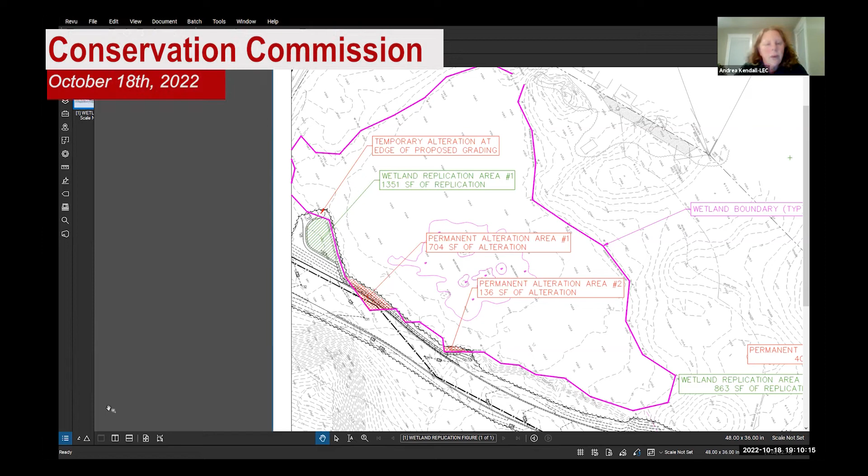A series of hydrophytic plants, wetland plugs, shrubs, trees, and ferns will be installed within the wetland area. As we grade up to join the grades in the upland, we'll be proposing a buffer zone restoration adjacent to there, where we'll be putting in native trees and shrubs.

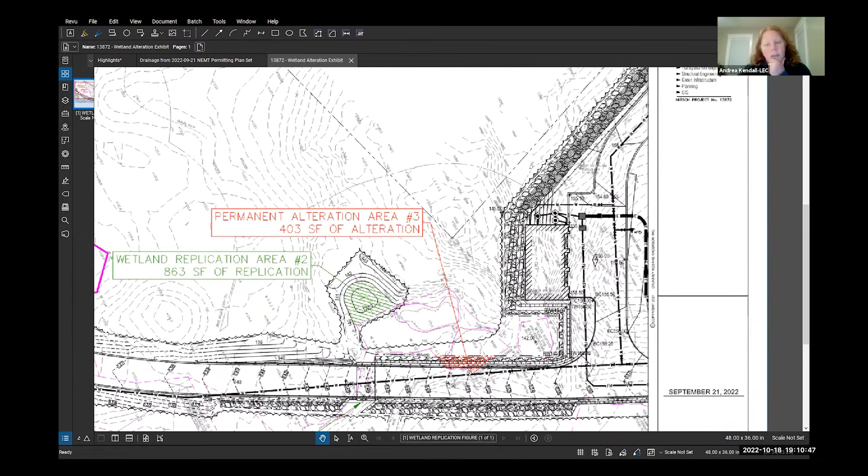The same approach is planned over at wetland 3, where we're proposing 403 square feet of wetland impact adjacent to the retaining wall, and the wetland replication area size is 863 square feet. We'll be cutting back the contours, lowering the grades, putting in wetland soils if needed, and then planting it, along with planting the buffer zone area.

In terms of isolated vegetated wetlands that aren't subject to jurisdiction under the Wetlands Protection Act, we're impacting 213 square feet between wetland area 3A and 4. The amount of wetland replication we're providing totals 2,214 square feet, providing mitigation in total for all the wetland impacts.

When we consider both BVW and IVW impacts, we're providing a 1.5 to 1 ratio of replacement to impact. If we didn't consider the IVW and just took into account the BVW, we're providing a 1.8 to 1 ratio. So we're more than exceeding what's required under the Wetlands Protection Act, which is a 1-to-1 replacement.

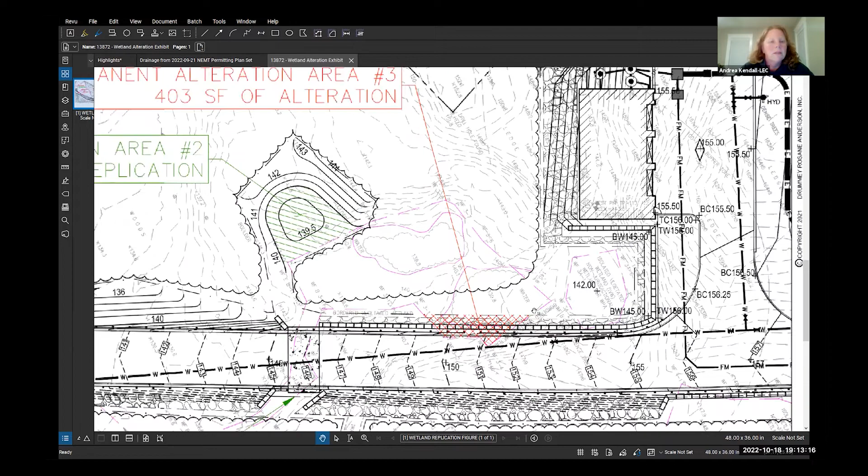For each of the impacts, we're providing wetland replication very close to the impact areas, and that's one of the requirements under the Act. We will be monitoring this for 2 years at a minimum, until everything meets its performance standards for vegetative cover and success, watching for any introduction of invasive species, and providing yearly reports to the commission.

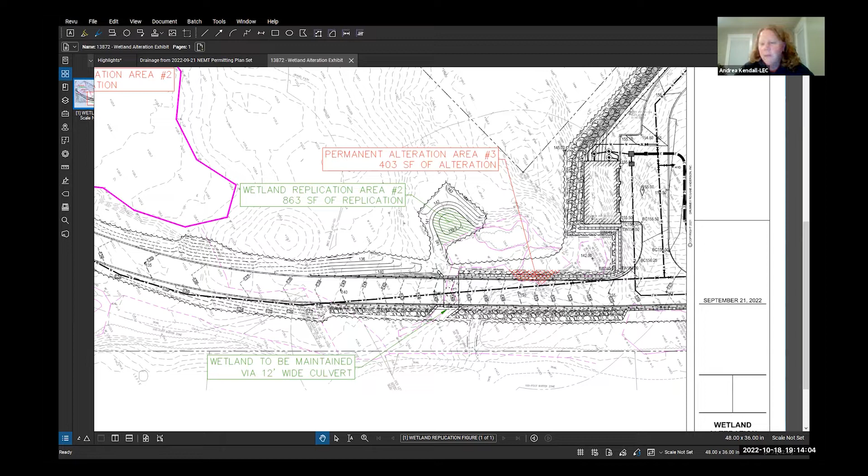Any questions on impacts as it relates to the wetland replication area, before I move on to the crossing? I just have a couple of questions.

As I understand what you're saying, for this wetland replication area number 2, you're regrading around the existing topography to make that depression and do all that stuff, right? Correct. Are these plans showing the existing grades or the proposed contours outside?

Outside of that, I'm just trying to figure out if all these contours here are going to stay the same. Nothing's going to happen out here — nothing has to happen out here to do your work. Is that correct?

Yeah, the dark line work are the proposed grades, and the lighter, dashed line work are the existing grades. We'll be working pretty much within that footprint of the tree hatch to get the grading to blend in back into the existing grades.

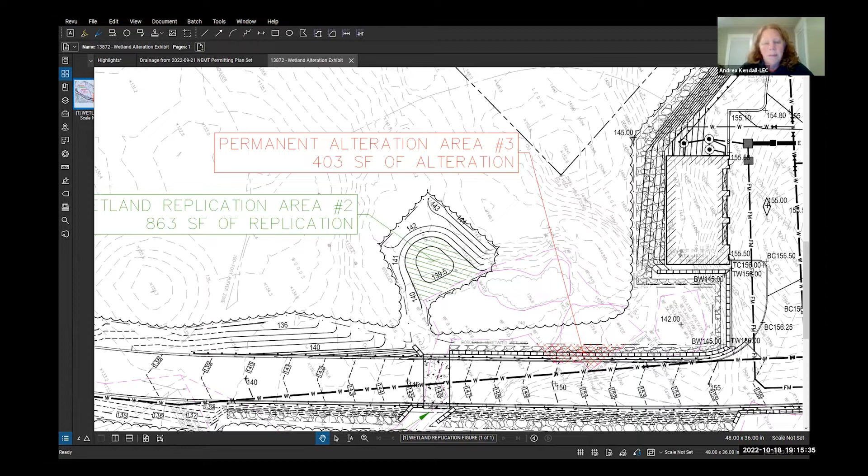So we'll be excavating and moving that material out of this particular area, and depending on whether it's suitable for reuse elsewhere on site, it'll either be incorporated or trucked off site. Okay, so that is the extent of grading. Correct. Now, is this discharge point an existing discharge location in the field?

Or is this a point that you're creating, where you've got this coming underneath the road and going to the other side? That little finger there — at some point in time, somebody excavated that channel. It looks very historic; it's hard to say when, but it probably was an isolated wetland at some time.

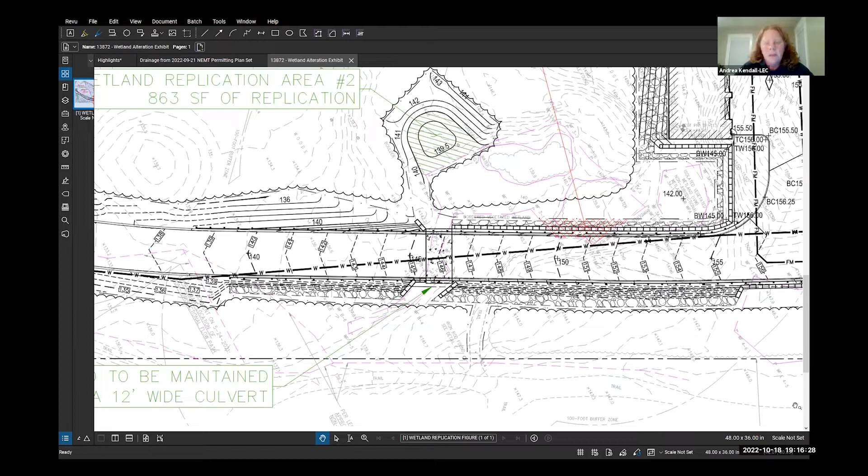When that feature was excavated, it in essence created this little segment of an intermittent stream, because at least on an annual basis there is flow coming out of wetland 3 into that, then dissipating into the forest. It's coming out of wetland 3, correct.

So it flows down, plan south and then plan west, and then that channel feature ends and the water just fans out. We're going to be maintaining that feature through the installation of a 12-foot wide, 3-sided culvert.

It's 3 feet tall and about 30 feet long, and there are retaining walls or wing walls at the top and bottom, to further limit any impacts to the wetland and stream system.

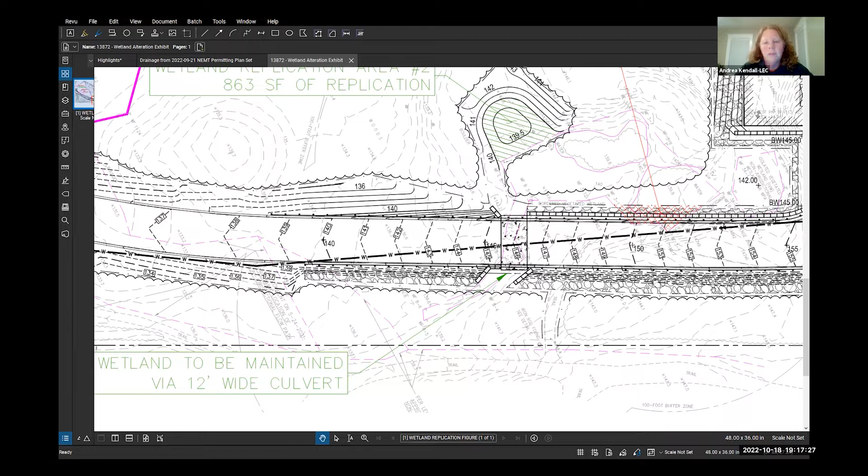Can you move over to the other one, the bigger area, the Wetland 1 area? Yeah.

So you're showing the perimeter of the BVW, so all the grading shown around it is not going to be touched, correct? Right, the limit of work. Everything else, there'll be erosion controls at the limit of work to prevent construction equipment from inadvertently going in there. That will be clearly marked and installed in the field. Everything else, the only activities adjacent to or just inside Wetland Series 1, is all associated with the driveway and installation of the wetland replication area.

So it looks as if you were to cut into the ledge to the left of Wetland 1, you'd be able to shift the road over a bit and potentially stay out of the wetland entirely. I know we saw the ledge there, but it would be possible to cut into that, it looked like.

So shifting the road to the south might lessen or eliminate impacts to Wetland 1, but then it starts to encroach on the other wetlands to the plan south. But it looks like there might be room to curve that road a bit more to the left, or plan south, after that wetland, right where the grade starts changing, between the two replication areas, across from Wetland 1.

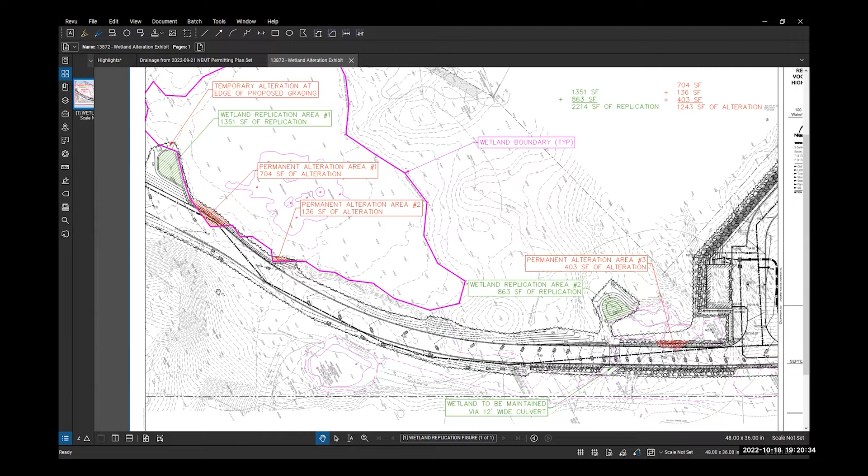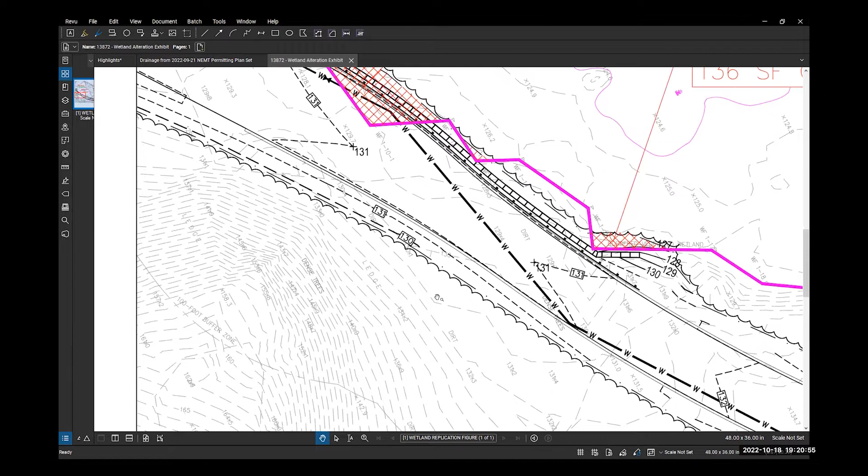So just to point out the ledge feature, sliding it over about 8 feet or so, I think we'd still be in the wetland. I think we'd jump up about 17 feet as far as ledge removal goes. But can you really talk about ledge removal on this job? I mean, this is a ledge removal job.

Right, but all these are a balancing act. There's an economic cost to ledge, there's a value of a wetland, and there's also a value of maintaining the woods. That's why we present these - we're trying to present what we think is our best balance, because it's not always just one factor; there might be more value in a smaller disturbance to the woodlands themselves. But it could be slid south, though that one would start to jump up really quick.

I've got some concern about the road being right up against the wetland, and it faces south, so the sun is going to shine on it all the time. I think that's going to degrade a lot of the wetland with no buffer zone - zero buffer zone for a lot of this.

And can I just ask, has the town accepted this as the road and not required any kind of sidewalk? And if a sidewalk is required, where would you put it, and wouldn't that be further alteration?

So we're working through competing opinions and wish lists for the project from even outside the project. The project isn't proposing a sidewalk at the current time. It's just something the school didn't want. If we had to add a sidewalk, we would hold the plan at the north curb line, and then extend everything south, which would probably be the least impactful.

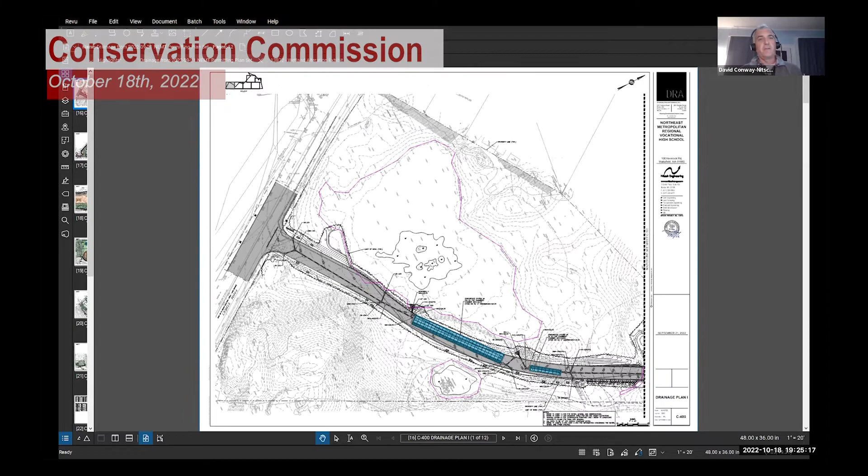Yeah, but if you can imagine dropping a circle on that. And it's a roundabout, not a rotary. I think folks in your neighborhood driving through - I think someone's added a ton of them, maybe in Melrose. So it's like a smaller roundabout, not a rotary.

And I'll just follow up on the sidewalk. I was in that meeting where Steve Mayer was pretty adamant that there'll be a sidewalk. I think we discussed that. I did speak with him again, and as far as I hear, he believes there will be a sidewalk. So I don't know how you guys want to reconcile that, but I get the feeling that there might be a sidewalk.

Hi Rebecca, this is Joe DeSantis from PMA. Can you hear me? Yes. So we actually have a meeting with the superintendent, Dave DeBarry, and Steve Mayo, and DCR representatives to discuss this very thing this week. So we have a plan of attack, it's just up in the air right now. But as David said, the current plans reflect no sidewalk, no rotary, as that's the professional design team's recommendation for the project.

And is that the meeting, the traffic advisory meeting this Friday? Two different meetings. So we also have a traffic advisory meeting this Friday. I meant to say that. Thank you very much. Oh, that's right. I'm just wondering, so by the next meeting, we probably would have more information on the likelihood of both the sidewalk and the rotary for this. Okay, all right, thank you.

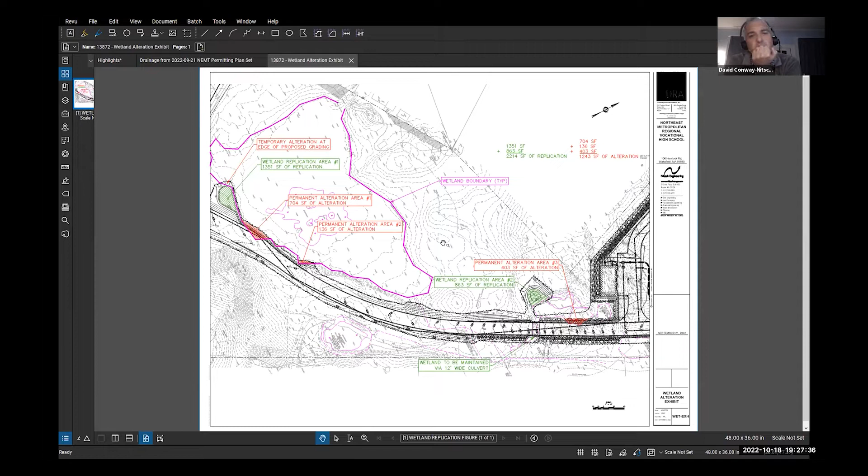Hopefully those are the only ones. But you see where we're coming from, obviously. Oh, I do, but no - I am being a little facetious, but I was also giving myself time to think. But as far as the roadway goes, no, that would be about it.

Through the rest of the site and the building, those things are fairly well set too. As things drag on, budgets and time become money and budgets get stretched. So if it's up by the school, pavers may become concrete or something like that. But the materials might take a hit, not impervious areas or things like that.

Was any thought given to having the road exit the parking lot just north of that proposed replication area too? So north of the existing road, coming out straight through there, staying on the property, coming through and going around that - exactly - and then cutting down, something like that.

So we would wipe out all of that Series 3 wetland. I'm not seeing that. Right, and that geometry would be fairly severe.

We have 3 and 3A right there. If you came off right below that, the property line came straight through above those wetlands, basically where the replication area is being shown, and then curve into the existing road. Not sure if you're getting what I'm talking about. I don't think we could avoid it.

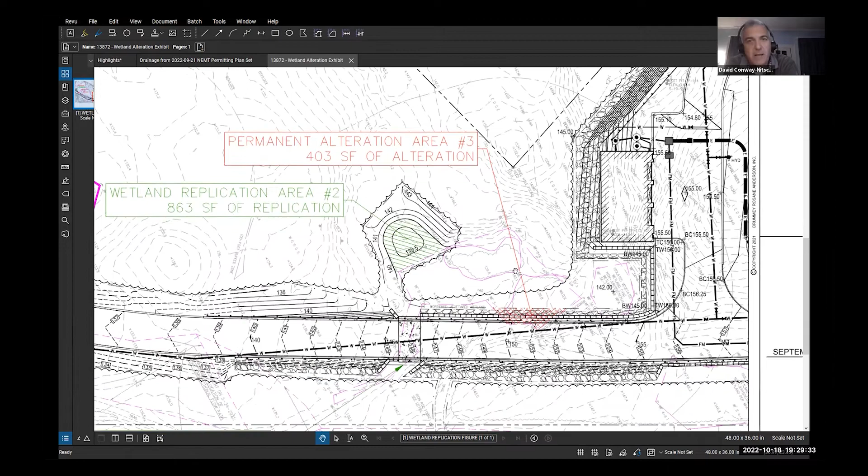Paige, can you zoom in a little bit, because wetland 3 kind of pops up towards that corner. See the fuchsia? Okay, north of the fuchsia and south of the property line. I think we would be in about the same or more impacts to that wetland. If you look at that distance and then look at what a road with walls on either side would require, we would just be having more impacts to that particular wetland.

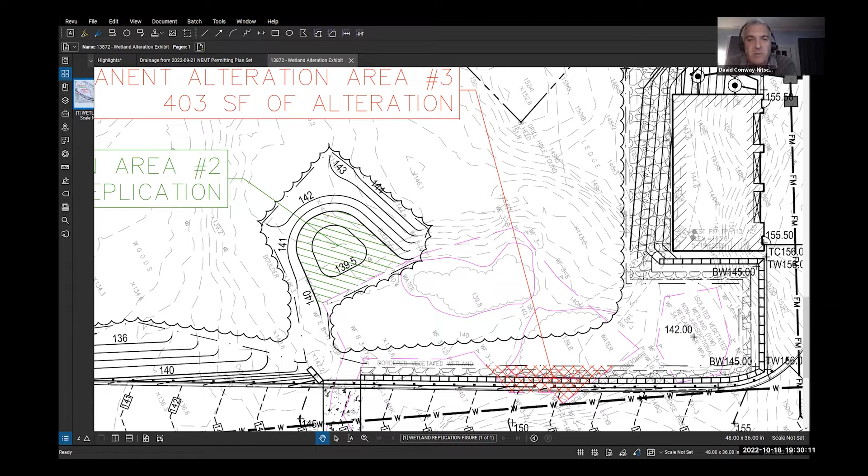So if you can zoom out a little bit, Paige, just to give us perspective. Is June circle shown here, David, or no? Sorry to cut you off there. No, this sheet doesn't go far enough, okay.

If you look at our roadway section at this point, it goes wall, guardrail, roadway, guardrail, wall. Getting it through that we would probably have the same or more impacts to 3. And then the issue becomes again the geometry of trying to get back on track with school buses and trucks out to Farm Street.

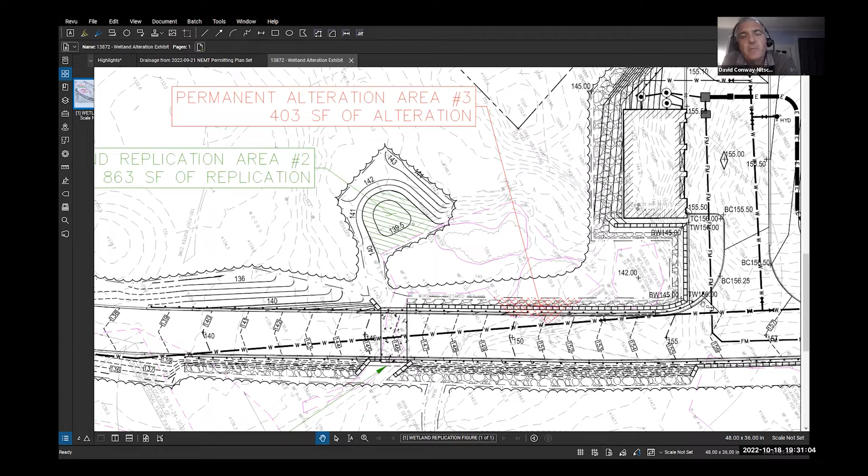Paige, is this drawing, did you put a dimension on between that property line and that? I think it's probably about, yep, I can. Thanks, let's measure.

Trying to find the measure tool. It was there under tool. Oh there it is, hold on, this one. That's what I was looking for. Just make sure the scale's right.

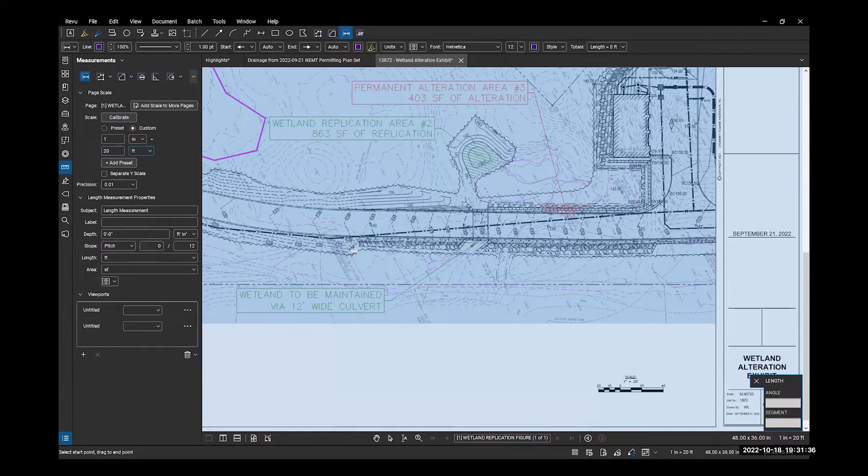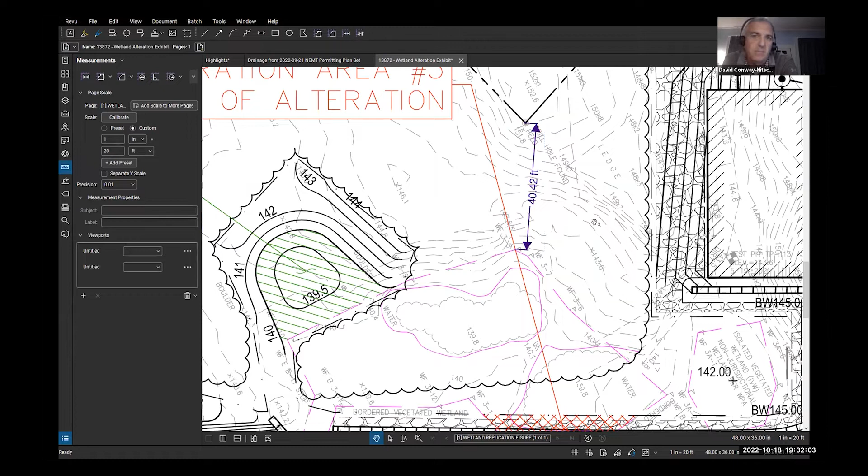Trying to make sure this was to scale, but it is. So it'd be about 40, that's feet, like a 40-foot corridor. Actually a little less just because of where she tagged it, but then we'd have a wall too, which might be in a setback, which might kill us.

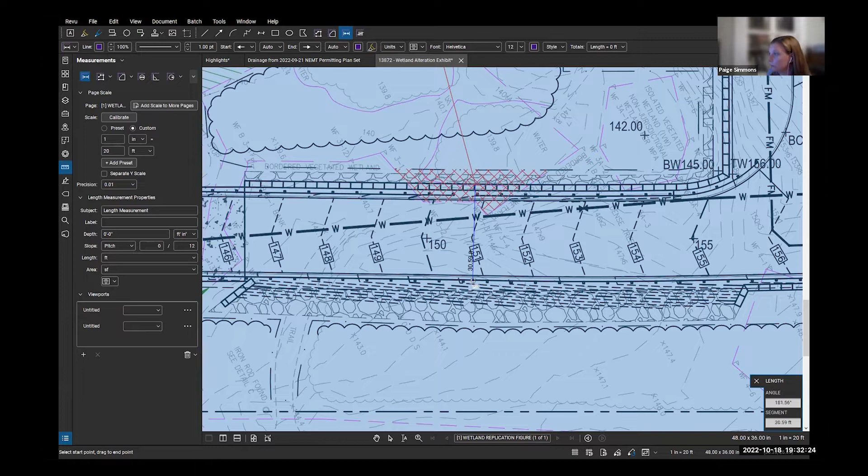And how wide is the road proposed in that area right now, just south of that? From the face of the wall to what would be the face of the firewall, 30, yeah, 35. And then from the base of the riprap to the other base of the riprap, what would that be? There's quite an elevation change in there.

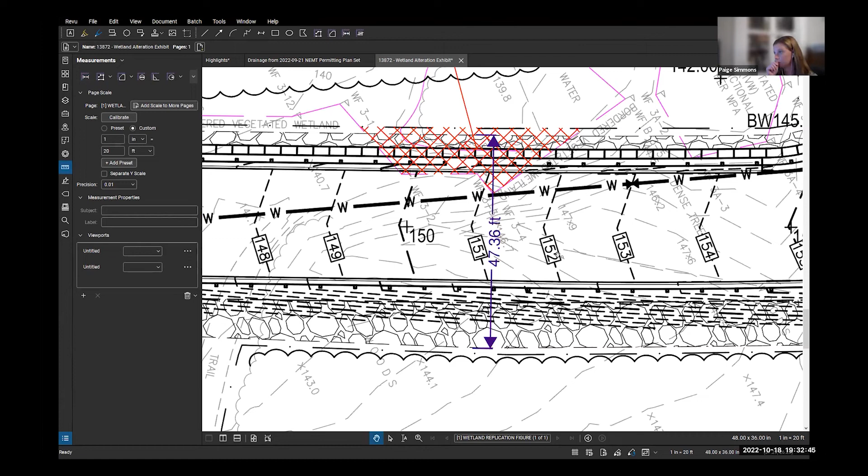47 feet. I mean, it looks like it could potentially fit. I don't know, I didn't look at the grades and see if it's better or worse. And I have to apologize because I don't know your zoning bylaw for front and back setbacks, but that might mean we're not able to have the walls that close to the property line.

The large rectangle to the right of that area, above the riprap, what is that? Maintenance building. Okay, so it's like a garage. Yeah, you can see the utilities coming out of the top. Oh yeah, I got it.

All right, so it looks like that could possibly be an option. I think it's something to look at. It would potentially keep you away from creating that wetland replication area and the culvert and all that other work in that area.

Again, we can look into, we can ask our local counsel just about that. I'm sorry, but I think we would need walls to do it, and the setback's probably at least 20 feet.

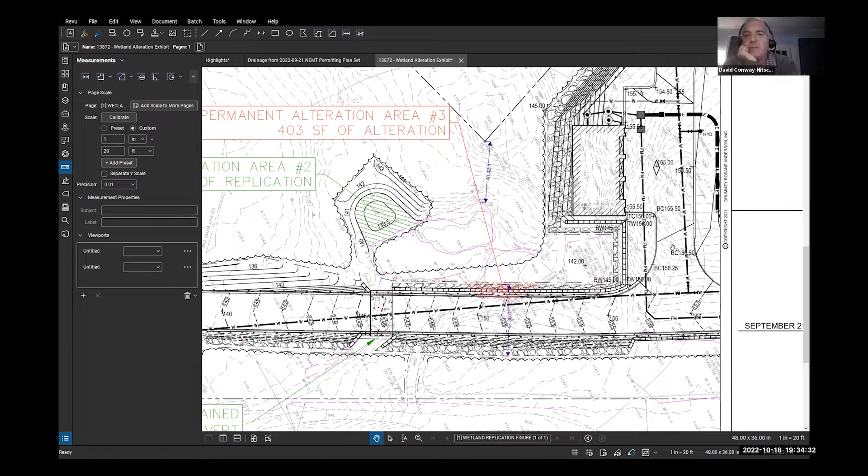Is it an option to push that road plan south to avoid that second replication area? There's no knob of ledge like there is on the other one. But first, Paige, can you pull up the overview, like the whole site, because that will help frame the conversation. The same answer you've heard from me before, but if you can find it... Oh I like this, yeah, that one.

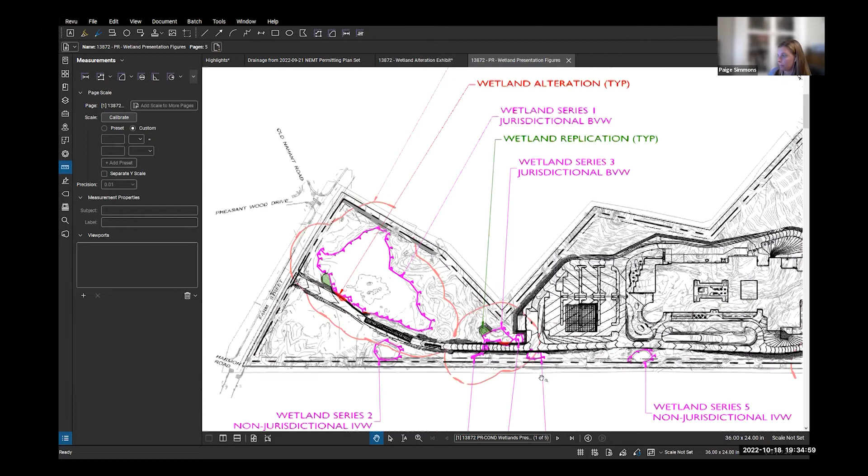So the one on the left, the first replication area, the concern there is the bedrock, right? Chewing into that knob, yep. That's most of the concern, right?

Yeah, and then the farther away you push from the first one, it pushes you into the non-jurisdictional series 2, which is non-jurisdictional, but we still kind of treat it as having value. But that seems to be a better option.

Well, I don't know from that point how far down you have to push it, you know what I mean? If you can just alter a shorter section, I understand you gotta get buses through and you can't make it a noodle. But I think you have a little bit of leeway to potentially avoid the isolated vegetated wetland, but also be able to avoid the area to the north. I understand there's bedrock there, so that's a concern for you folks.

And the reason I asked this one to come up is because the way we divided up the sheets, they're kind of centered around the wetlands, so we end up looking at each one. But for this next series, which is 3 and 3A, we talked about going to the plan north of it. Now we're talking about whether it can slide farther down to go plan south. And that's when I think that wetland series is series 4.

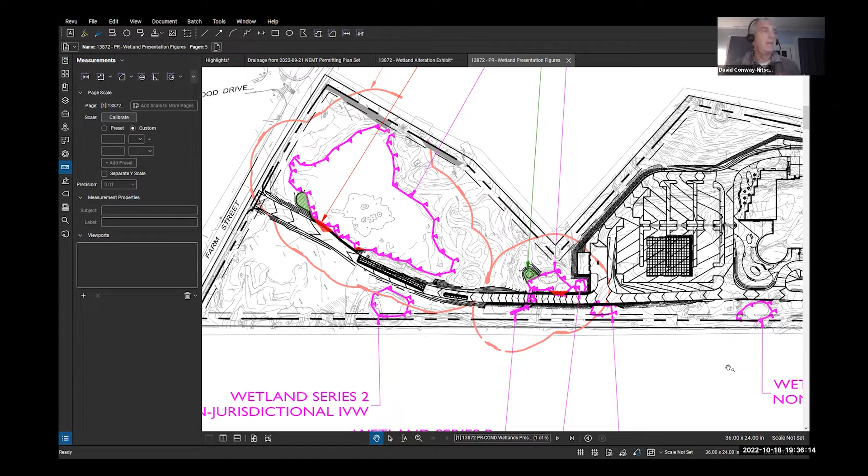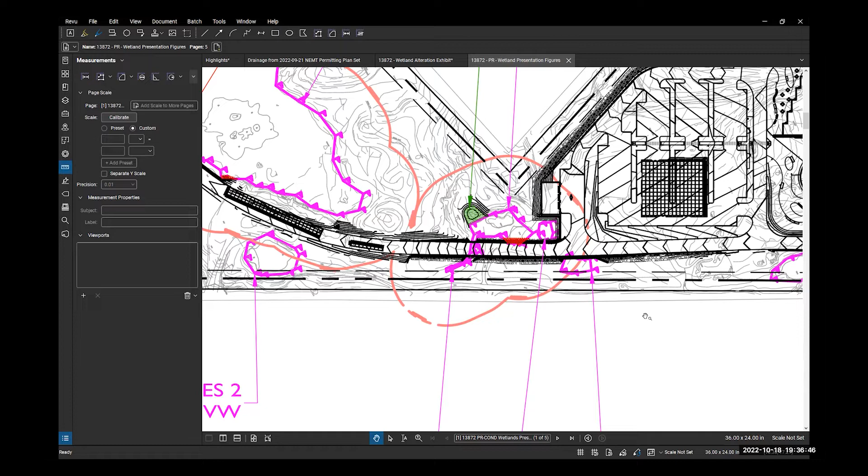It starts to push it down towards that. Right, but series four, I guess the question I have is how straight does it need to be, you know what I mean? Can you have a potential sweep where you're still doing the crossing over that excavated ditch, but have a little bit more of an arc so you're not being pushed into the other one? We're just thinking of being maybe a little creative, not having everything straight through, and curving a little bit to potentially work with it.

So you know what we have on our screen now. For the impact on the Plan South Series 4, we're right up against it, which we're minimizing with a wall. So we try to pull away from 3. We're going to wipe out probably 4 in its entirety, even with a wall. So these are kind of the Sophie's choices we made as we went through this, trying to minimize the impacts without just taking one out completely or something like that.

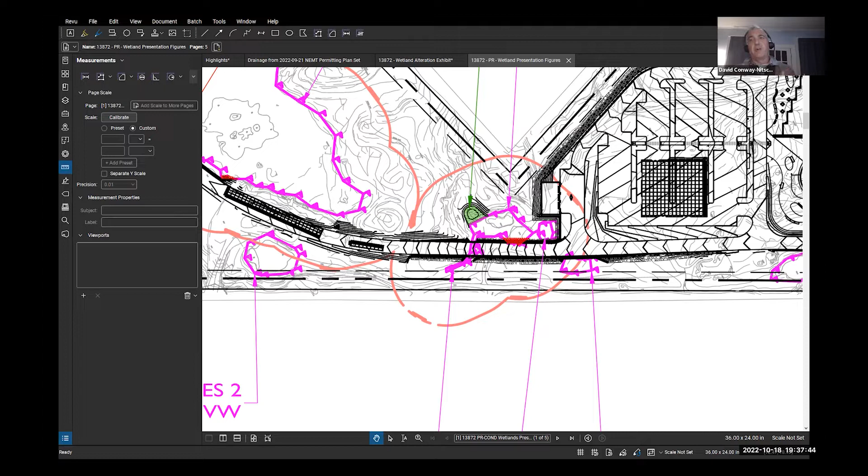We were trying to treat the non-jurisdictional ones as if they have value as well. We're providing infrastructure around them to kind of maintain it. And we're limited by the geometry for a driveway that's going to have school buses, trucks, the occasional truck on it. But we can maybe do some sketches and some test fits, though it's kind of moving chairs around on the deck.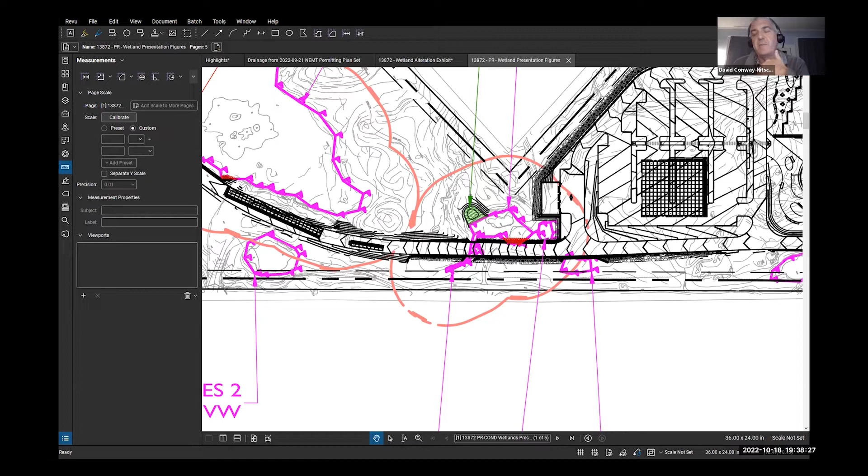And as far as we get closer to Farm Street, if we slide it Plan South down at the entrance, the impacts to get that road in, the type of construction needed, becomes much more invasive. So it's trying to balance that as well.

And it's not cost, but it's a lot of ledge removal versus - and this is kind of the case before you, right - a lot of ledge removal versus trying to minimize some wetland impacts and then providing some new healthy areas for the wetlands themselves to grow in.

But I'm not telling you anything you don't know already.

Did you do any soil sampling in that area? We did, I think the board's aware, we did test pits as part of the last project. Was that the last 3 test pits that you dug? I don't know what the last 3 are that they did. No, because we actually did some at the baseball field - those were the last ones we did. So are you putting Cultec chambers in there? Is that what that is?

Yeah, and so if we want to move on, Paige can kind of walk through the stormwater. She has some graphics prepared for that.

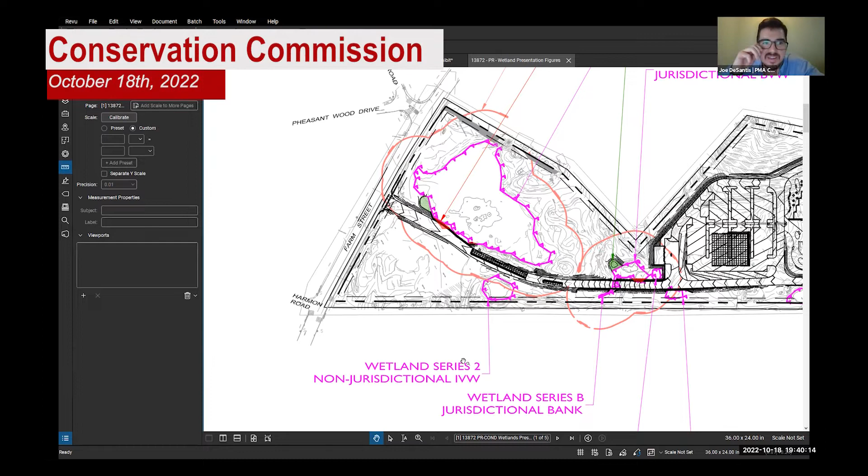Sorry, but before we move on, I think we should know where we stand with that in terms of any kind of follow-up requirements. Mr. Chair, if you don't mind, if I butt in for a second. Yeah, no, please go ahead. Thank you, sorry about that. You took the words out of my mouth.

Thank you. I think just for our team, we have our professional engineering recommendation that LEC, Nitsch, Warner Larson, their team has looked at minimizing the impact to this area through the current placement. I think any kind of follow-up test fit that you ask us to do will likely result in that same kind of stance because they've already done this in their own office. They may just not have the nice graphics to show it. But with that said, I think we should just be on the same page about how to move forward on this one and keep us moving through.

I mean, I think our take is we'd like to minimize the need for replication. It doesn't always go well, and you've already got something that's functioning, then you're taking that away and trying to replicate it. So I think our point is, if there's a way to reduce the need for replication by making some slight adjustments to the road, that would be what we'd be looking for.

I understand there'd be more cutting or blasting potentially at the Farm Street end, which you'd probably have to do anyways if you're going to end up with a sidewalk. But it looks like there's an opportunity there that could make things better for us.

And then the other spot up near alteration area 3, I think it was, I would like you to look at the possibility of if a road could come in above that wetland below the property line and avoid that wetland altogether. Don't know if it's doable, again, setbacks and all that, but at least take a look at it.

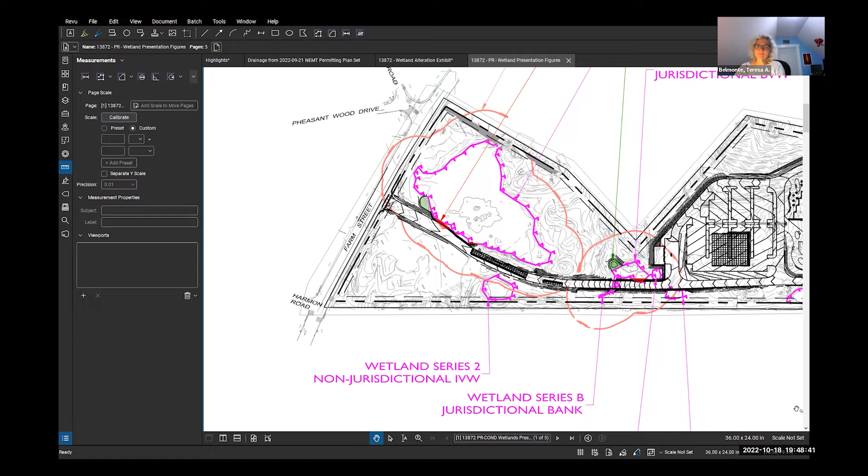So in terms of bordering vegetated wetland, I can just go through it. This report memo was included in the notice of intent application that Nitsch submitted. For BVW, there are 7 performance standards. The first one says that the surface of the replacement area shall be created equal to that of the area that will be lost. So at a minimum, considering just BVW, we're providing a 1.8 to 1 replacement, so that we're meeting. The second one is in relation to groundwater and surface elevation of the replacement area shall be approximately equal to that of the lost area.

And it's along the same wetland segment, we're intercepting the groundwater. The grades are going to be very similar to that adjacent wetland, that wetland area being impacted. The third requirement is that the overall horizontal configuration and location of the replacement area with respect to the bank shall be similar to that of the lost area.

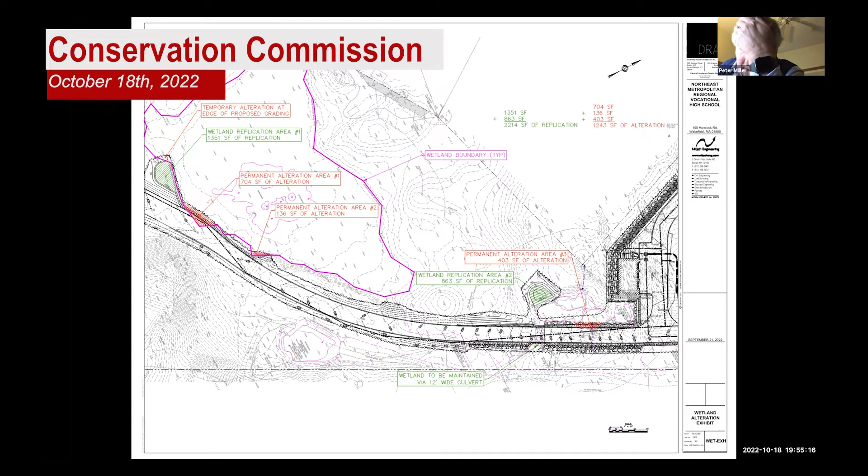And I guess I just want to understand whether, when you build right up and eliminate the buffer zone across a pretty substantial stretch, isn't it incumbent on you to show us that it won't damage the wetland, or that if it does, you're going to replicate it or something. I don't even know, I guess I'll ask my fellow commissioners, but I don't think it's... I just have to think that's something incumbent on the applicant to say that while we are eliminating the wetland, completely eliminating the wetland on a southern edge, and I focus on that's going to be hot sun coming right across the hot top.

It's going to heat up the wetland. It's going to take away the shade. And I'm just trying to understand whether that is something that should be specifically considered.

So the performance standards for the stormwater management are meant to ensure the health of the wetlands, so that when we do have roads proximate to wetlands, it's not just drainage, is it? It's sunlight, it's canopy, lots, yeah, certainly a canopy concern. We always talk about canopy, and I'm having a hard time understanding why. I feel like we're just throwing out that consideration.

I think the state through the act provides the requirements for work in these areas. Now, we're trying to minimize the extent practical and also provide the performance standards for the direct alterations that are occurring.

The other matters we'll talk about trees later on, but as far as the roadway itself, the DEP developed the stormwater management standards to protect the waters of the Commonwealth. The point of having a buffer zone is also to protect wetlands. A buffer zone is a trigger for a filing, it's not prohibited, it's not a no-build zone, so we need to make that clear.

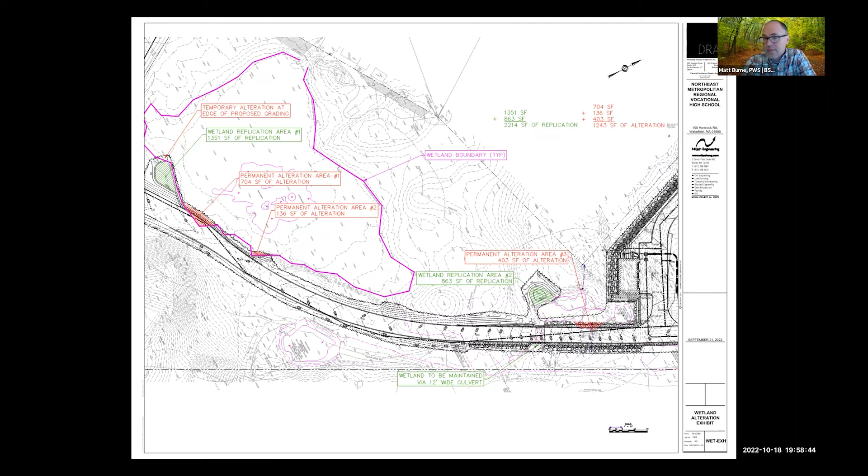Clearly a roadway that is located entirely within the buffer zone to a BVW on its southern edge is likely to result in changes to microclimate within the wetland itself, water temperature. Theoretically, the stormwater management should maintain water quantities—that is the goal of that—and water quality.

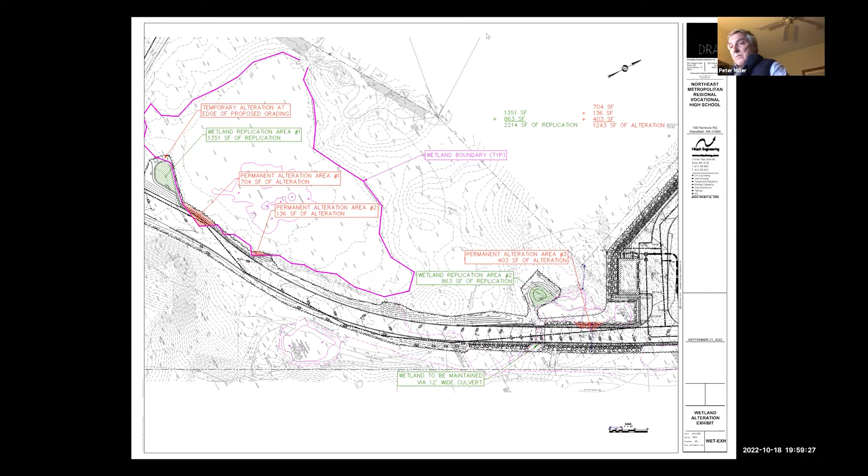But there are other considerations that the buffer zone contributes to the protection of the functional values of that wetland. I think it would be appropriate for the commission to request an evaluation of the project's impacts on the wetland overall, addressing the functional value of the buffer zone in its ability to protect the wetland resource itself. That is the purpose of the buffer zone—not just a trigger to get people looking at things, but actually to protect wetlands. So I think it's appropriate for the proposal to address that question.

So I think we would need some pretty clear direction on what the question is, and not just the existential question of why having a road here at all, which is kind of what I'm trying to filter through.

No, indeed. But I think Andrea will be a good resource, turning to say, okay, if we have to think about addressing the likely impacts to bordering vegetated wetland that are likely to occur because of a road situated the way we're looking at here, what are the ways in which the buffer zone helps protect the physical and biological characteristics of that wetland?

You're going to be taking out a 40-foot wide strip, 50-foot wide strip of trees, and that is going to alter the insolation of the wetland. That will have an effect on hydrology, and that'll likely have an effect on a number of different wetland functional values. So that's something to address.